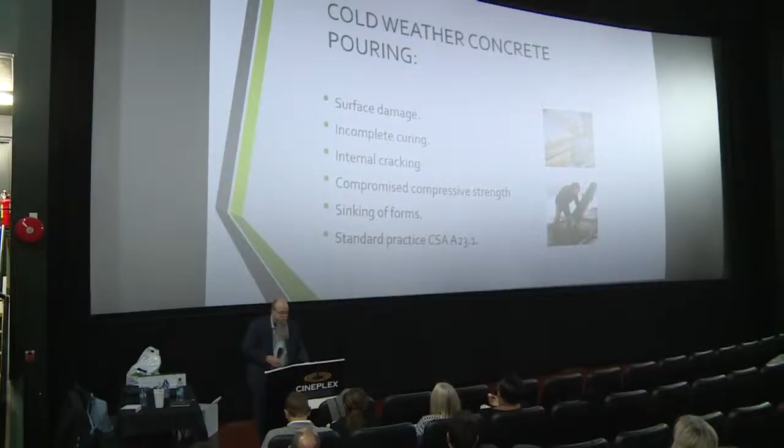Another consideration is an example from last year where we had an issue where some forms were built. An insulated tarp was placed over the formwork with a heater, and it was left overnight to heat the area in preparation for pouring the next morning. The heat thawed the ground, allowing the formwork to sink almost 2 inches into the ground, and that went unnoticed. And the difference in the elevation required days of rework to fix.

So it would be a great idea for everyone involved in concrete work to refresh their knowledge of cold weather concrete requirements and methods. So, our update, what we've been doing for the last year.

What's that? Nope, one back. I'm going to go like this every time it needs to switch. Maybe not quite as drastic as that, but.

So over the last year, we've been focused on writing and revising the quality program, preparing quality moments like the one I just read, preparing newsletters, quality plans, inspection and test plans, reviewing site records, preparing project teams for customer audits, implementing a site quality inspection checklist. And some of you may be thinking, what do we need a quality program for when we've never needed one before? And that would be a pretty reasonable question.

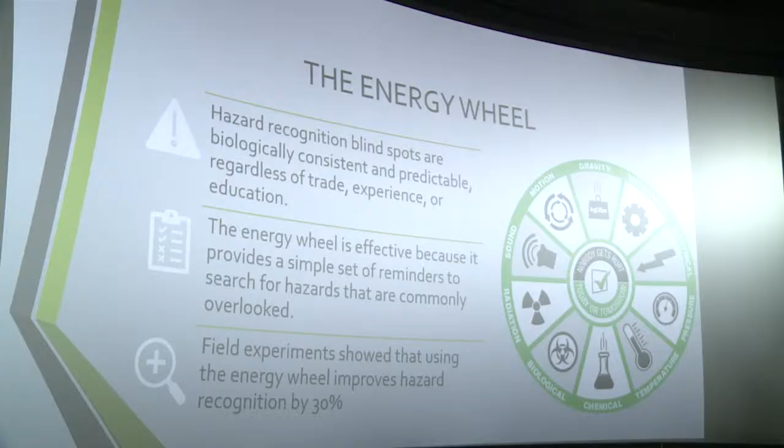So this quote is from Dr. Matthew Hallowell. Identifying hazards is a critical component of any safety program. And based on natural limitations, even the most experienced construction professionals will identify only 45% of the hazards in each site. So the energy wheel: hazard recognition blind spots are biologically consistent and predictable, and they're regardless of trade, experience, or education. And the energy wheel is effective because it provides a simple set of reminders to search for hazards that are commonly overlooked. Field experiments showed that using the energy wheel improves hazard recognition by over 30%.

So, my fingers just stopped working.

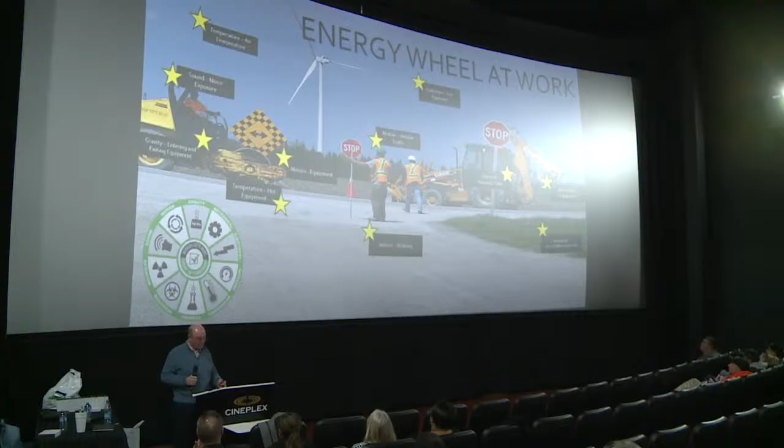Looking at the grass, we got biological hazards. Could have been just recently sprayed. There's allergens there. Just the motion of walking and the motion of vehicular traffic. The temperature, right, for the equipment. Gravity getting in and out of that packer. The sound and noise exposure from the thing.

Just a quick look, though, at Buddy running the stop sign there. Is he in the right position for what he's doing? No. Where should he be? He should be looking at the camera if he's directing traffic from the road coming towards him, right? So, good, I'm glad you caught that. This thing gonna quit. There you go.

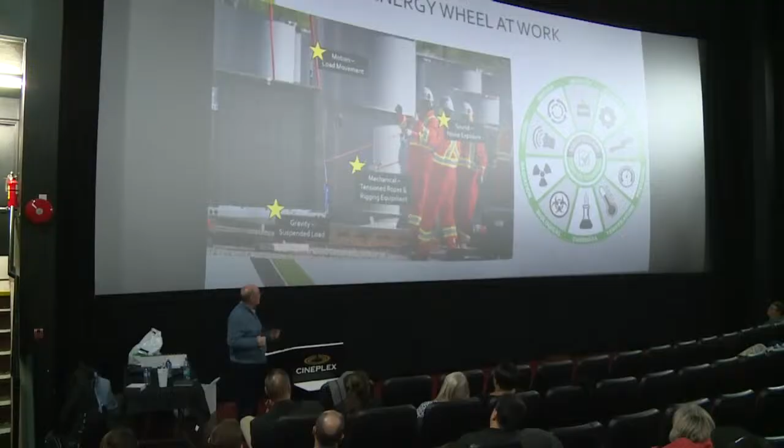So the next one, have a quick look at this scenario. There seems to be 4 guys here ready to go. Okay? Now, thinking of the energy wheel, we have motion for the load. You've got 2 guys holding tag lines, so you got mechanical tension from the ropes and rigging. You got the gravity of the suspended load. And you got sound exposure. Obviously, it's a loud environment because they're all wearing muffs.

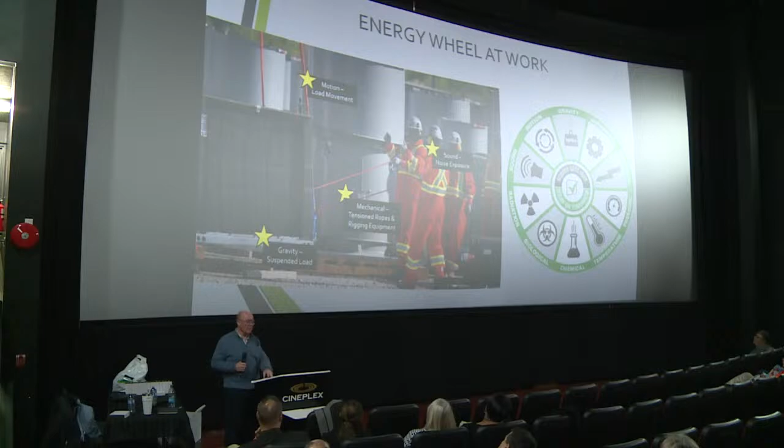Anything else in that picture bother anybody? If I can use this fancy laser. I don't know if you can see that. Buddy here is off to the side. Don't see what his part is to play. The guy on the right. You've got 3 guys there. Looks like they're directly involved. You have a 4th off to the side.

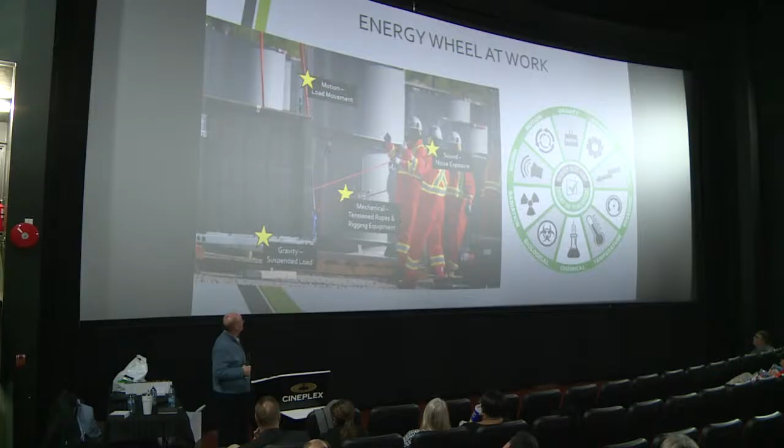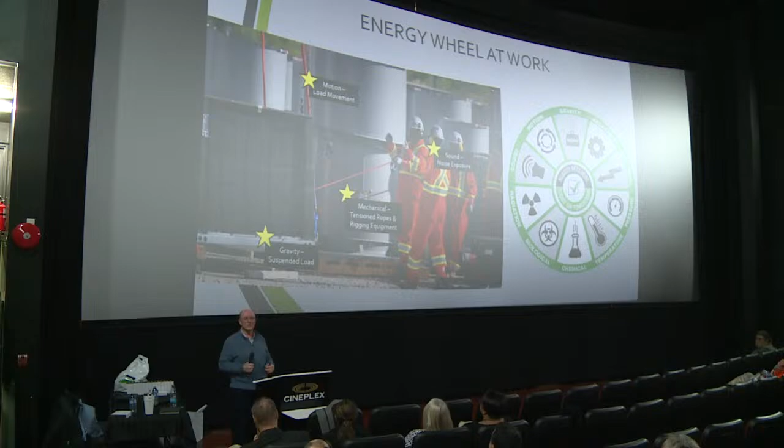Also, the other issue that I have with this activity, you got 2 guys on the tag line, and the one guy on the tag line closest to the picture, he's also signaling, right? You got enough guys to do the job, you assign somebody to the task, and that makes it a lot safer. Let the guys tagging the load concentrate on tagging the load and let somebody else do the signaling. So that's my own thoughts anyway.

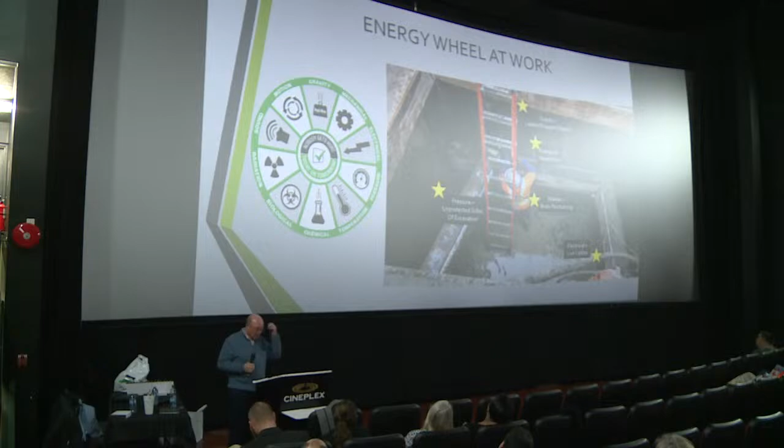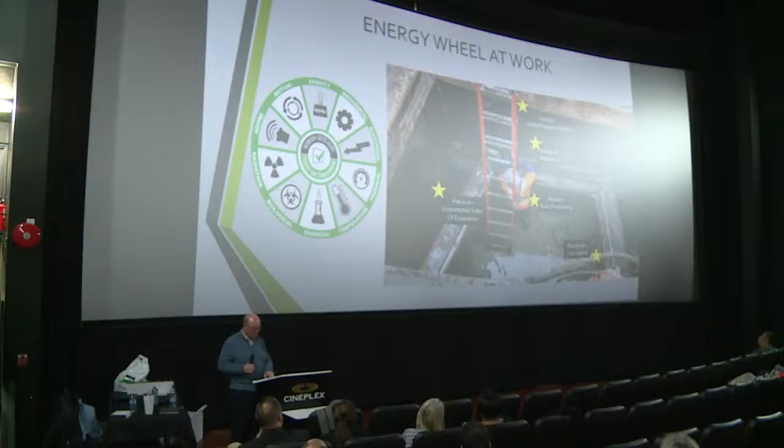So, what do we see here? We've got gravity, obviously, from the ladder and dropped objects. The wood dust, because if you can see in that picture, he's cutting that wood. So he's trying to move that timber over, would be my guess. The unprotected edges, where the star is here, the unprotected edges, there's nothing there. It's just straight down cut dirt, you can see it. Electrical cables. Should he be in there?

I heard some no's. Based on what I'm seeing in this picture, the answer is definitely no. Exactly. He's got shoring on one spot, right, in front of the ladder, seemingly behind, but on his left-hand side where he's cutting that big timber, on the left it's just straight down dirt. So it's not a safe excavation, right?

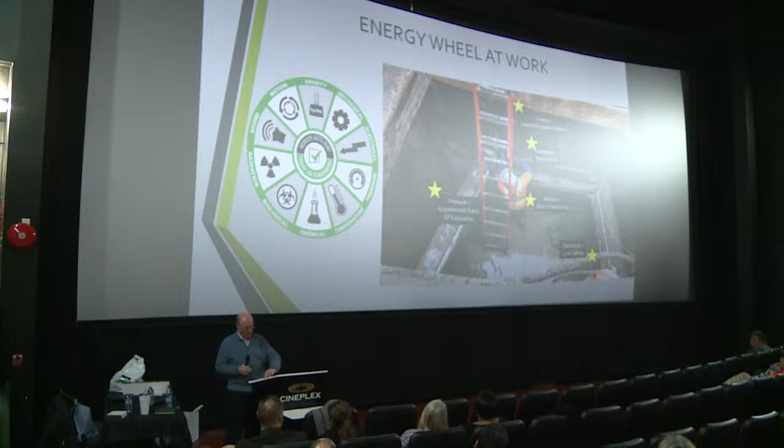Stuff we encounter all the time, right? We move through a job, we get started. He's down there and notices it. What's the best thing he could do? Stop and get out of there and say, let's have a look, guys, and let's redo this, right? That's really what all this stuff's about.

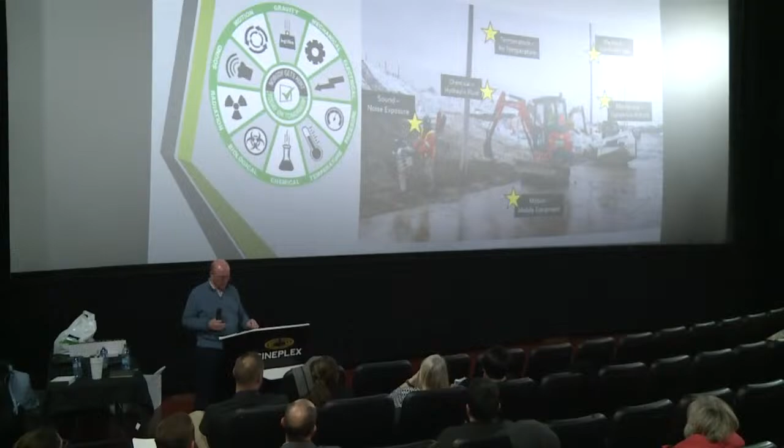Here's an easy one. Lots of equipment in the area. Now that you've seen all these, you should be able to pick these hazards out real quick. So, overhead line's always the one to get, you think it's out of the way, but it's still there. It's still a hazard in the area. Something happens to one of these poles, it gets undermined, right? You got the equipment failure.

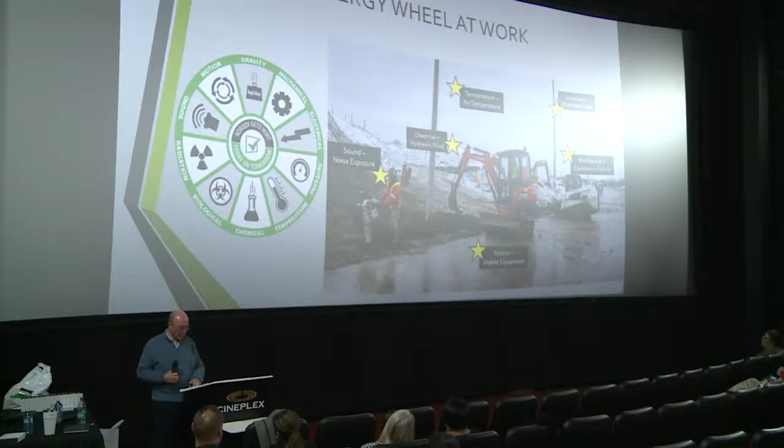Air temperature, obviously, it's a cold day. Cold and wet. You see the ground's all wet around there. The motion of the equipment, hydraulic fluid, sound exposure using that jumping jack. Operators being aware of those around them. You've got that skid steer buzzing around. You've got that Mini X and that other one behind. And the gentleman with his back to everybody running his compactor, right?

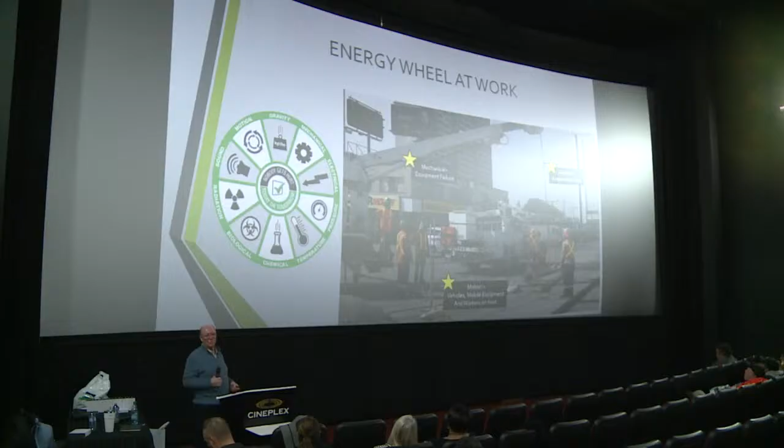Here's another operation with an RBD. Fence in between. So, do we think about mechanical failure when we're working with this stuff? We should. That's why we don't get underneath the boom, right? Don't get between the boom and the load. We've got 4 workers on one side of the fence. We have one on the near side with the pole by himself holding a loose tag line. I'd like to see another, when you're tagging stuff as 2 people, right? And when you're tagging something like that, you're both pulling. So then it's a much easier and better way to control the line.

The gentleman's got his bin open in the truck. He's got his back to the work area, which is not ideal. And again, we've got 4 guys on one side of the fence and only one on the other with the pole. A better setup would be he should have a partner helping him out. But if you look at the bottom of where he's standing, this thing's freaking useless, right there. See how close he is to that little ledge? That's something you take your mind off of what you're doing. You just step back as that pole's being raised, and now you've got a guy falling with an uncontrolled load, right?

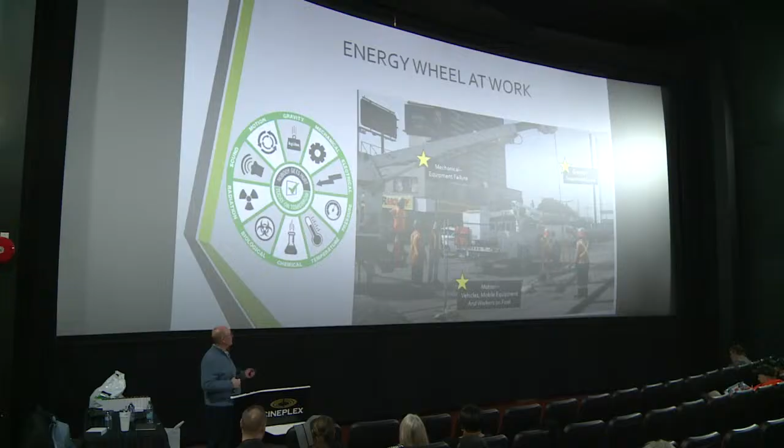So, are these criticisms that I'm making? Not particularly. What it is, is observations. It's getting you to think about the stuff that you're doing. Take those extra looks, right? Don't just keep moving along at a fast pace. Do all your movements measured and make sure that they're all controlled and identified.

So, when we talk about the energy wheel, again, workers identify only about 45% of the hazards they face. Hazard recognition blind spots are consistent and predictable, regardless of trade and experience or education. Hazards that are easily identifiable, gravity and motion, are recognized instinctually and require comparatively low cognitive effort. But hazards that are most often missed, mechanical, pressure, chemical, require relatively high cognitive effort.

Field experiments showed that using the energy wheel improves hazard recognition by 30%. That's a good boost, and it will certainly help make for a safer environment. The energy wheel is effective because it provides a simple set of reminders that are commonly overlooked. And science suggests that some hazards are overlooked because of blind spots that affect us all. In other words, what we once thought of as complacency may actually be a predictable biological limitation.

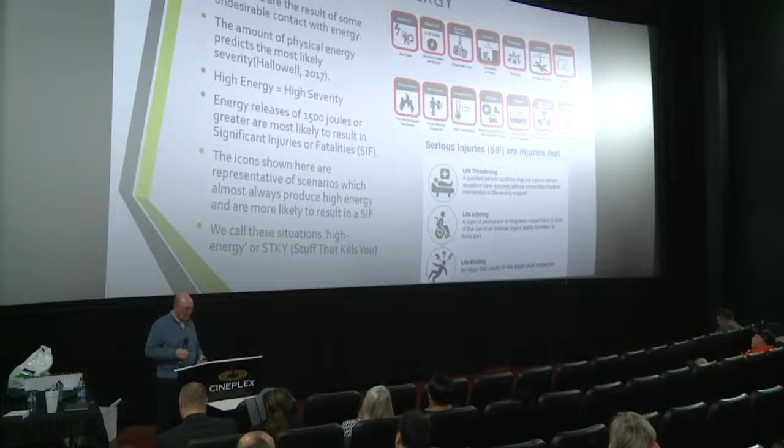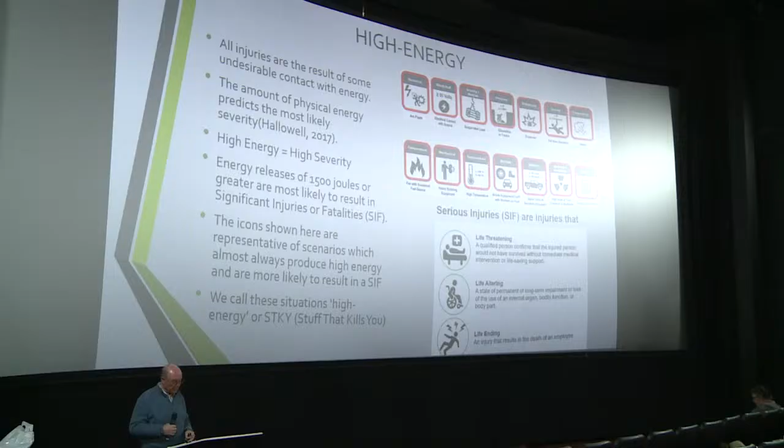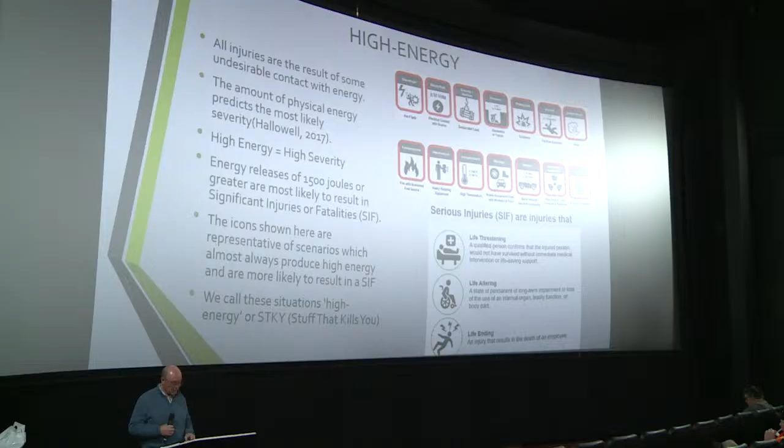So, in high energy, all injuries are a result of some undesirable contact with energy. The amount of physical energy predicts the most likely severity. High energy equals high severity. Energy releases of 1,500 joules or greater are most likely to result in significant injuries or fatalities. The icons shown are representative scenarios which almost always produce high energy and are more likely to result in a serious injury or fatality. We call these situations high energy or sticky, the stuff that kills you.

Oh, that was cool. That's, yeah. No, thanks. I don't know what happened there. Gadgets and me just don't get along.

There we are. So, these sticky icons, the stuff that kills you. I see something blanked out there, the shit that kills you. These are all, again, things to spur thoughts, right? You look at these and they make you think. Look at the arc flash, the electrical, greater than 50 volts, gravity, pressure, the temperature, all that good stuff. It's just, again, to make you think. That's what checklists are all about. Because not everybody knows everything, right? So checklists do make you think about the stuff that you're going to be working on.

So controls: after the hazards have been identified, we must know the different options we have to add layers of protection. All identified hazards must have safeguards applied to them to protect from harm or damage. All SIF hazards must have direct controls applied to the target energy source.

So a safeguard is a measure taken to protect someone or something from harm or damage, or to prevent something undesirable. Safeguards can include direct controls. A direct control that specifically targets an energy source, when installed, verified, and used correctly, will mitigate exposure and must be effective even when people make mistakes.

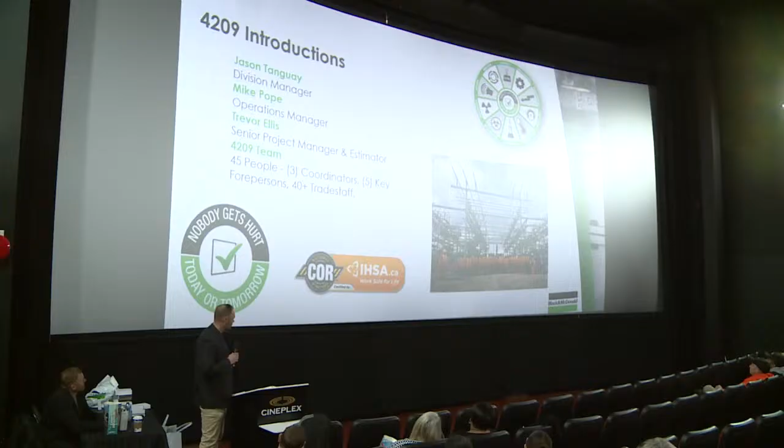Within the group, we have about 45 people. We have 3 coordinators, 5 key forepersons that lead our jobs in the field, and over 40 trade staff. Those 40 trade staff people are kind of homegrown Black McDonald people, and sometimes we pull from the local union halls as needed. That photo over there is a picture of the Lozon TS that was just completed with a lot of the team members.

Okay, hey everyone. So yeah, we've put a lot of work into our safety initiatives. We've come down to basically 3 things: communication, planning, and experience. A lot of our incidents that have happened, it's one of those 3 variables. So what we did is we put a bigger emphasis on communication. So now we do 6 meetings monthly for safety purposes and our processes. We start off with our monthly supervisor meeting with Sauer, the one that Wes hosts, and all our supervisors are on that. And then they report back to the field staff.

We also went a step above and now do a monthly foreman meeting. It's kind of turned into a bit of a round table type of meeting where foremen can bring up ideas, update the team on their projects, and also bring up safety incidents and near misses, and rely on each other for experience, and just create more of a well-versed and open dialogue in terms of safety. Because before, we tried our best, but we found that there were some improvements that could be made. So once we initiated that, we saw a difference immediately. We also do weekly safety meetings with our field crews.

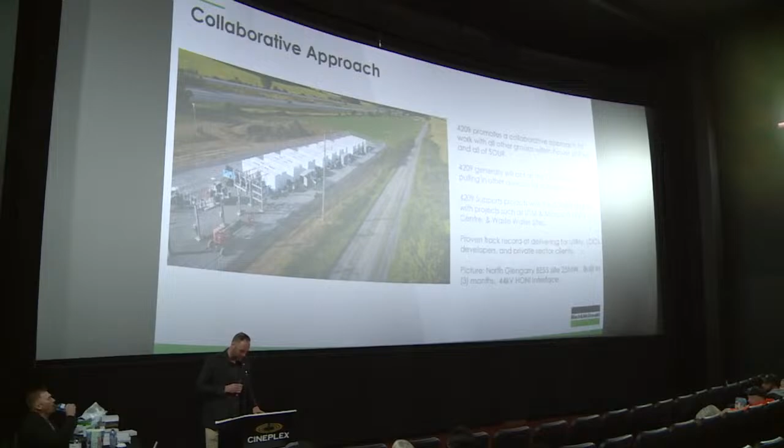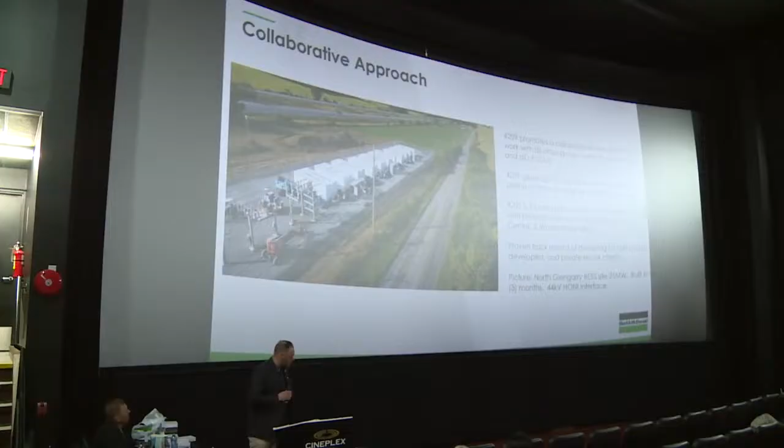Thanks, Mike. Just to add on the health and safety side of things, special projects this year had zeros across the board, so that's a great job to the guys that are here. I know most of the division is here. We worked over approximately 90,000 people hours this year, so that was a huge accomplishment.

So we really do promote a collaborative effort within the Power Utilities Group and across the Southern Ontario region, working with transportation and Joe's group. 4209, we will generally act as the GC on projects, pulling in other divisions for specialty scopes. 4209 supports projects on the electrical mechanical side, so we've done some projects at UTM this year, the Microsoft Data Center, and some wastewater sites.

We have a really strong track record with utility scale work, local LDCs, developers, and private sector clients. The picture that's shown there is a 25 megawatt battery storage project that we did in what's called an engineer, procure, construct model. So we did all the engineering, we did all the procurement, and we did the construction. We were boots on the ground there for about 3 months.

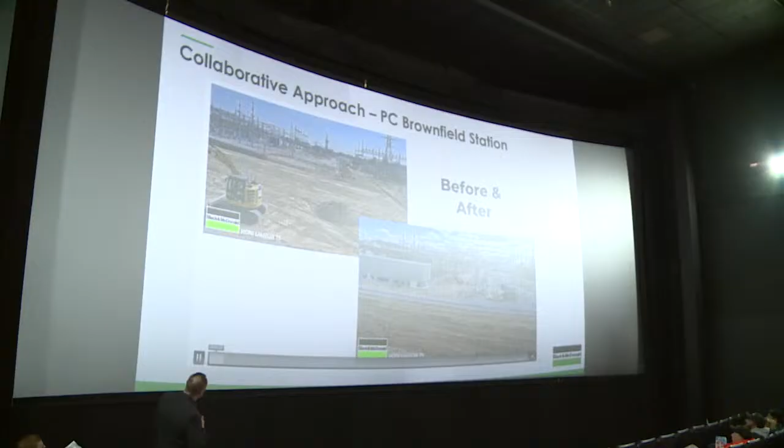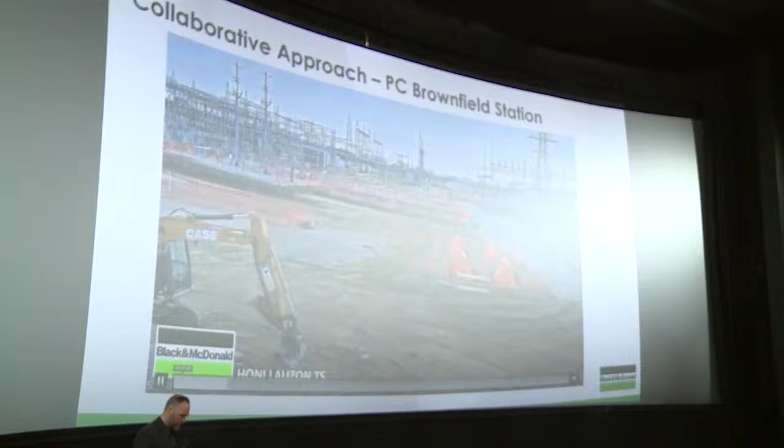Okay, so this project is in Windsor. It was project managed by Rob Palauta. The scope was to add a brand new 28 kV switch yard. We came across a lot of challenges on this project. We found abandoned cables in the ground, which really held us up. Nobody knew where those abandoned cables were, so we had to do a lot of investigating, a lot of hydrovacing to find either end so we could remove them.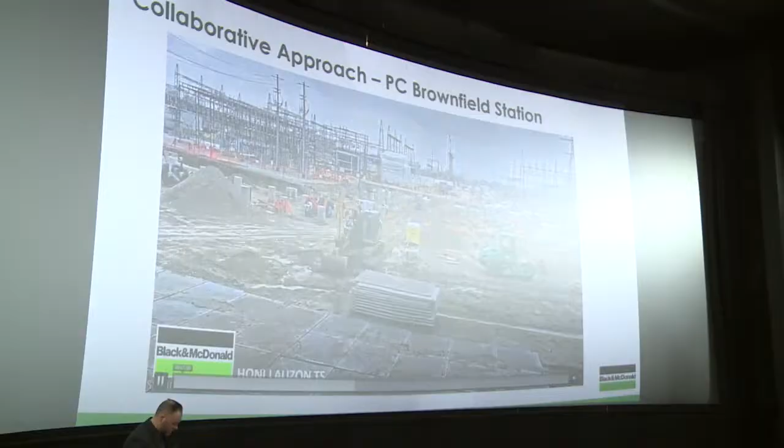We also were given a pretty lousy design upon mobilization. I would say at best it was a 60% design, so we really had to push Hydro One to get the design to where it needed to be so we could continue building. We had horrible winter working conditions. Everyone remembers last winter. It was cold every day. We had snow every day.

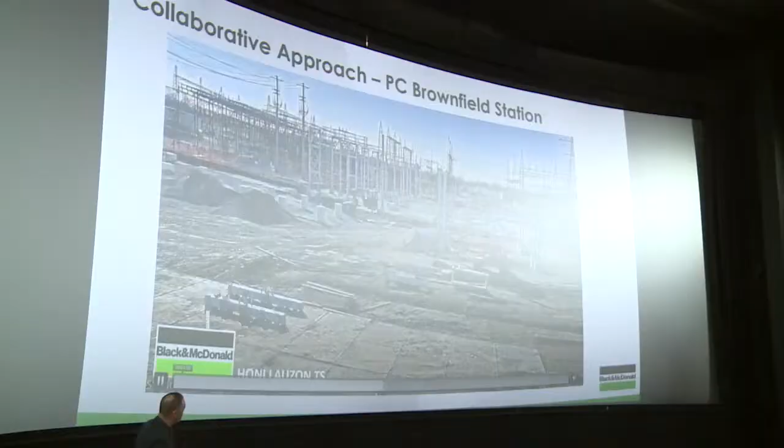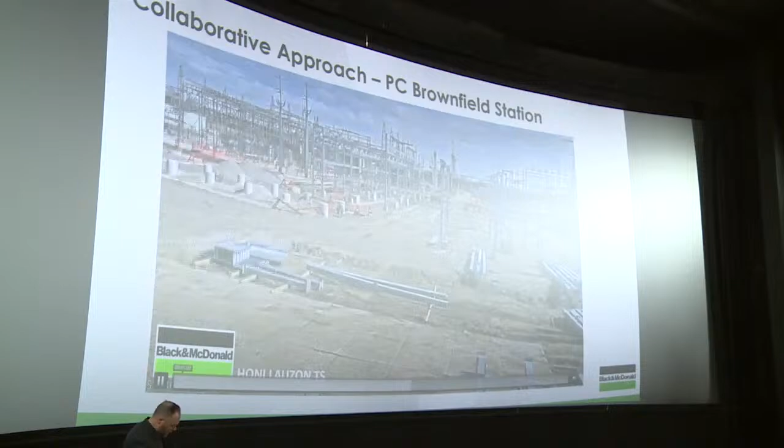We also had extremely tight access. Hydro One was working all around us, so they were constantly keeping their eyes on us, watching what we were doing and complaining and whining. The live station component, so everything around us was also live, so there was a lot of health and safety that went into this. And ultimately, the project was due to be substantially completed this year, and we made it, and Hydro One was actually extremely happy with the work.

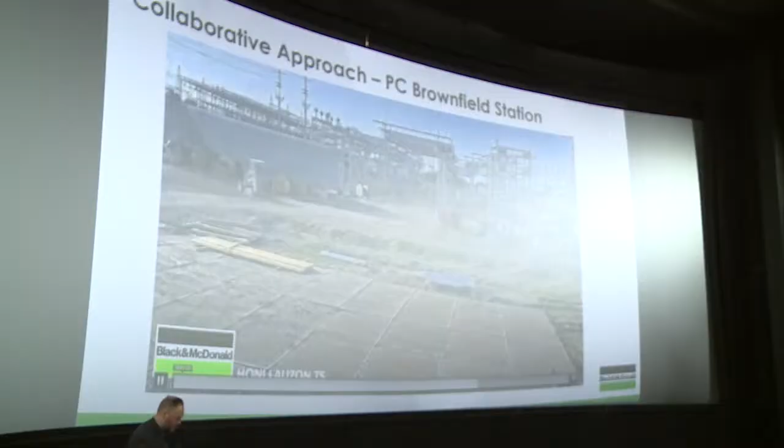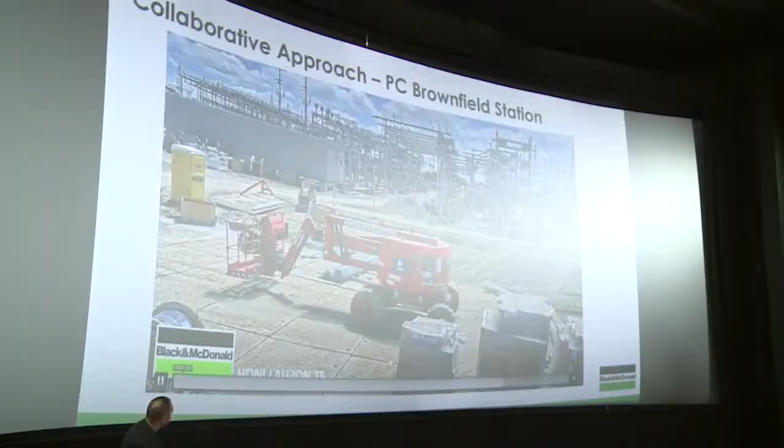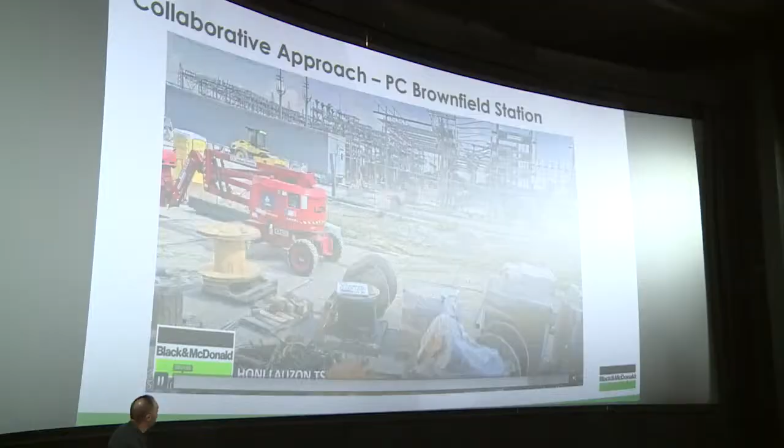Again, collaborative effort between my division, substations, Arjun's group. And that building that was installed there was actually the very first protection and control building that Black & McDonald had fully designed and engineered and installed for Hydro One. So basically at this point, we're just working our way out and cleaning up the site. And there's the team.

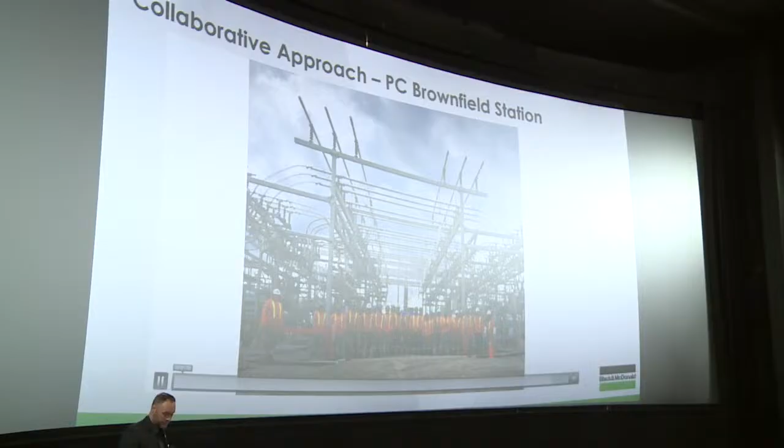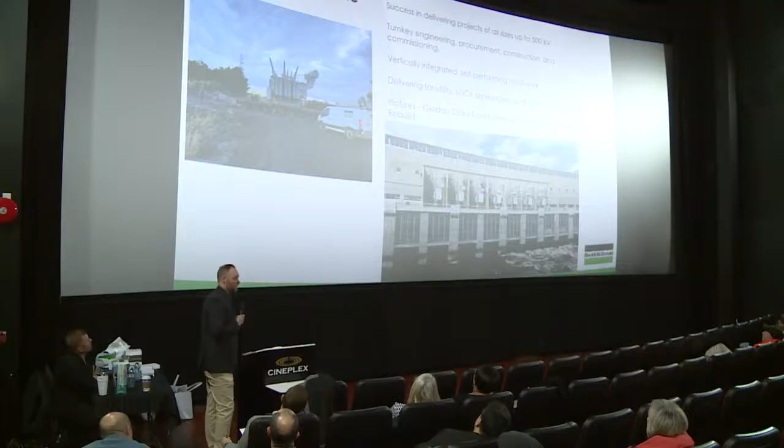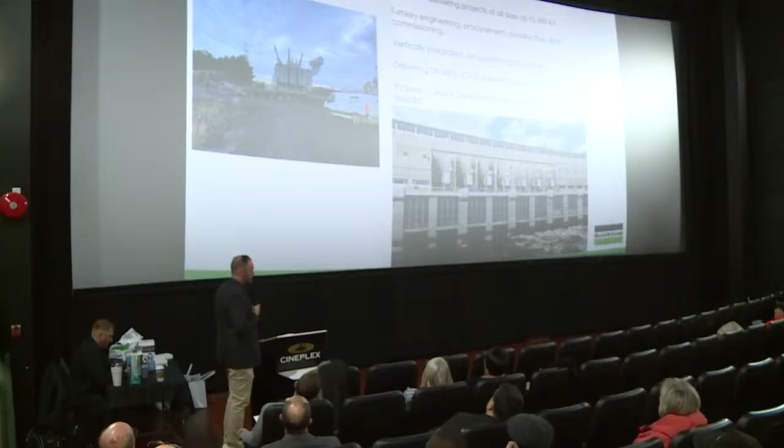Go ahead, next slide. So here's some other pretty cool projects we've done recently. We do projects of all different sizes, all different types of complexity. So turnkey engineering, procurement, and construction projects, like I said, the EPC model. We self-perform pretty much all of our own work. And again, delivering to the utilities, LDCs, private sector clients.

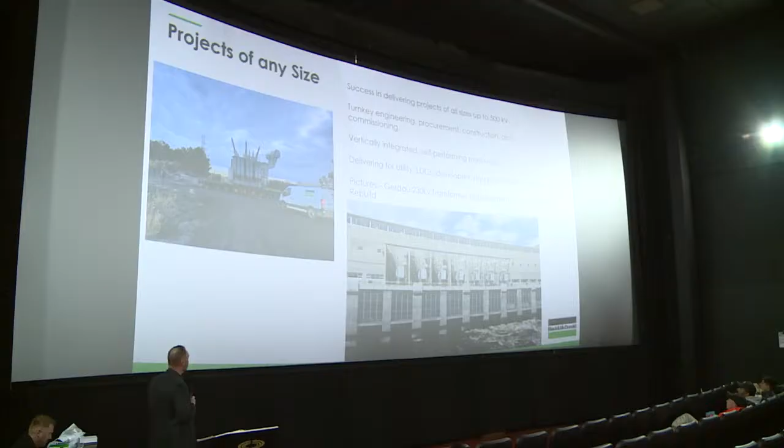The photo up in the top left is us removing a 100 MVA transformer from Gerdau Steel in Whitby and replacing it. And then one of my favorites is the picture in the bottom right there. Those are 7 massive transformers on the side of the Otto Holden generating station just outside of Mattawa. We had to take apart and fully rebuild those transformers in place for OPG. That was a really, really cool job.

This is another video. So this one has sound to it. Some of you might giggle to the sound. But this is called Old School DS. This is part of Hydro One's new distribution substation program where they have about 300 of these across the province that they're looking to replace. This is the second that we've done. They've done 3 now, and we've done all 3. And again, Hydro One's been very happy, and again, we've collaborated with Arjun's team to do commissioning here. So go ahead and play that video.

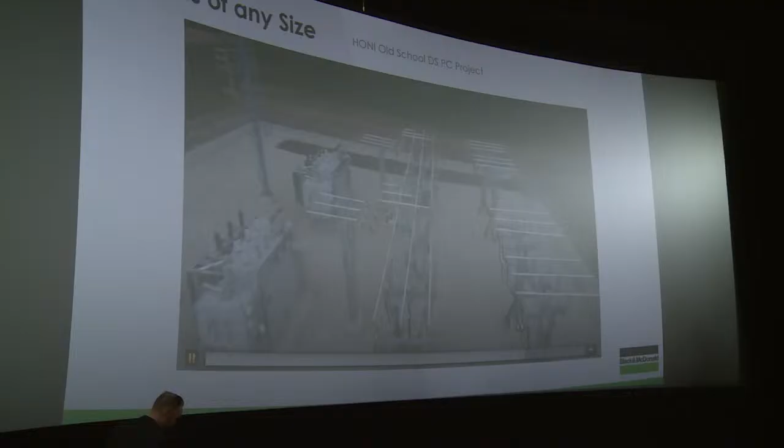So that project was, you can go next slide.

I feel like I should be tossing t-shirts or something. More hot dogs. Do you want to go to the next slide?

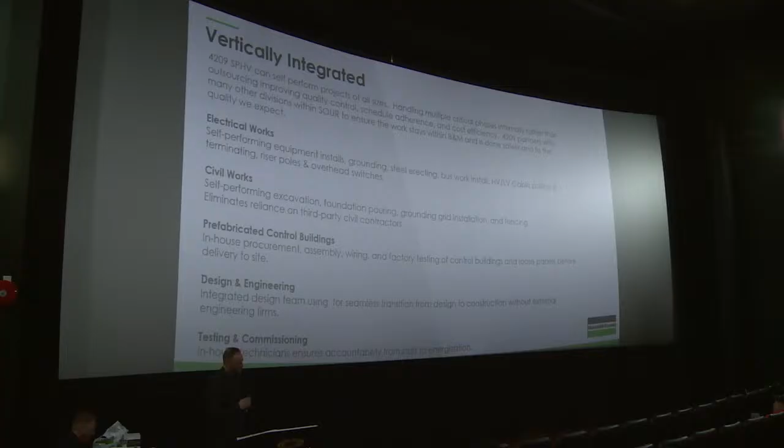So that project there was a PC model, they call it. So the engineering was designed, it was provided to us. We went out and procured all the equipment and materials for that job. And again, it was a very successful project, besides the excavator getting stolen, which wasn't ours, so that was good.

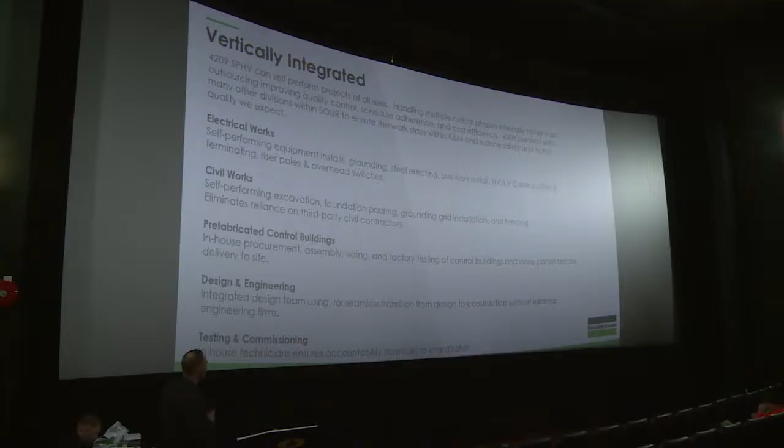So 4209, special projects. We can self-perform projects of any size, handling multiple critical phases internally rather than outsourcing. It improves control, quality, schedule adherence, and cost efficiencies. We partner with many other divisions within SOUR to ensure work stays within Black & McDonald and is done safely to the quality we expect.

So electrical works, we self-perform equipment installs, grounding, steel erecting, bus structures, HV and LV cable pulling and terminating, riser poles that are connected to substations and overhead switches. We also self-perform our civil work, so excavating, foundation pouring, ground grid installations, fencing, and that eliminates a reliance on third-party civil contractors. The prefabricated buildings, we do these at various sizes, and again, working collaboratively with Arjun.

Design and engineering, so we have this bolt-on with Arjun and Ryan's group as well. What really brings value to this piece is you have independent engineering firms out there that have no idea how to actually install or build a substation. Our group knows how to do it. So when Arjun's group is doing a design and they pass the design over to us for constructability reviews, we can find deficiencies and problems in the engineering stage that wouldn't necessarily be found if it's just an engineering firm pumping out a set of drawings.

And then last but not least, the testing and commissioning in-house, again, bolting on with Ryan and Arjun's group. So if there are defects or deficiencies found during post-construction, our team will go in and make those rectifications before we hand it over to the customer.

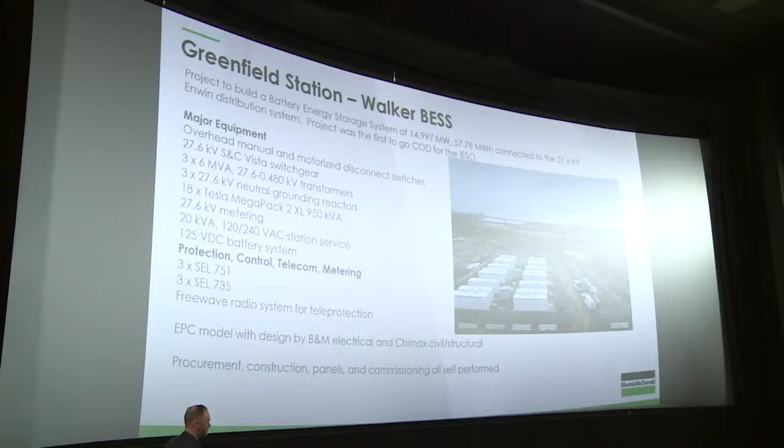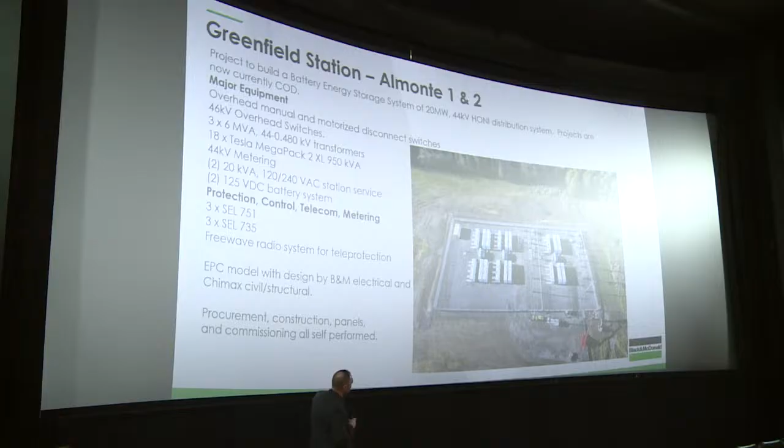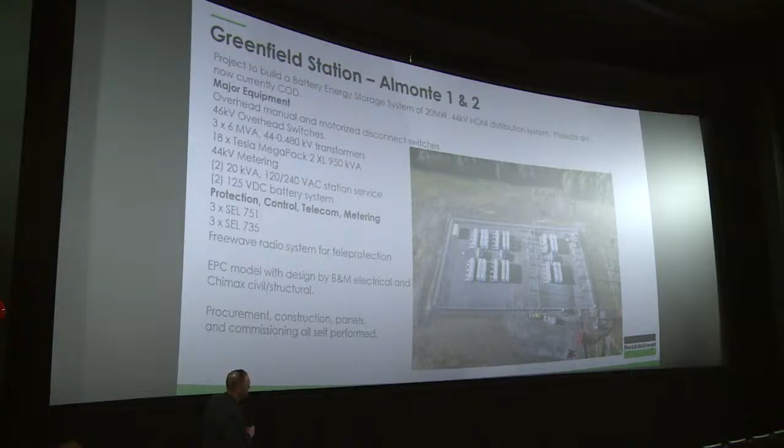Moving on to Almonte 1 and 2, these are 44 kV grid connected projects which fall under that same procurement model. So you can see the delineation between the right and the left side there. Again, these were full EPC projects by 4209. Everything was self-performed in-house, including the civil work. Here, this site sat on bedrock. So instead of forming and pouring foundations for the megapacks to sit on, we came up with a precast block method that the megapacks would sit on.

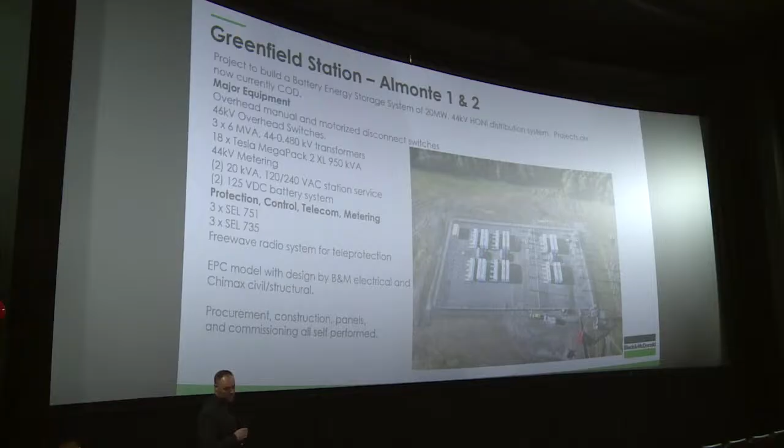So we could precast and build all the blocks off site before getting to site, because our client didn't have municipal approval for us to start in time. So the way we expedited it was precasting all of these off site. As soon as we got to site, we were able to scrape the topsoil back, pack down a layer of granular B, and then place these precast blocks right on, and then away we went with the megapacks. We saved about 6 weeks there.

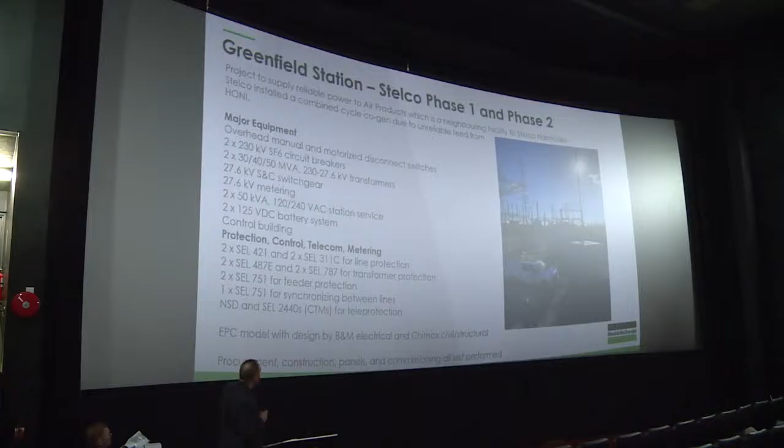This is Stelco. So this is a steel plant out in Nanticoke. They built a large cogeneration site on their site. There's a plant right next door to them called Air Products. Air Products feeds them various gases for their process, so Stelco can make steel. What was happening was the Hydro One line going into Air Products was very unreliable and kept tripping out, meaning it would take Stelco offline.

So Stelco got the idea to build a cogen, and they hired Black & McDonald to build the substation that would take the power from the cogen over to Air Products. So this was the site that we built. There's 2 transformers there, and again, this was done on a full EPC model.

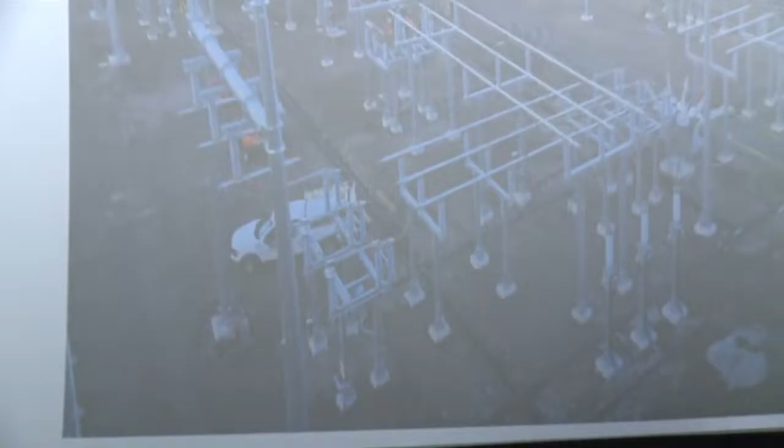Okay, this is one that we're approaching completion here. So this is called the Antoine Transformer Station. This one's just outside of North Bay. This is a massive footprint station, about 400 meters by 400 meters. There's 2 very large 230 kV to 115 kV, 120 MVA power transformers that are there.

So again, Black & McDonald is self-performing all of this work. The building you see in the top there, that was done under an EPC model. So essentially the brain of the substation is going to go into that building. All of the protection and control panels and relays and everything that'll control this substation are just going to go into that building. And we did the design of that building and we constructed it.

This project is being led by Alec Davis right now. And again, we're very close to nearing completion. We're already starting to battle some snow and ice up there already, so we're in good shape.

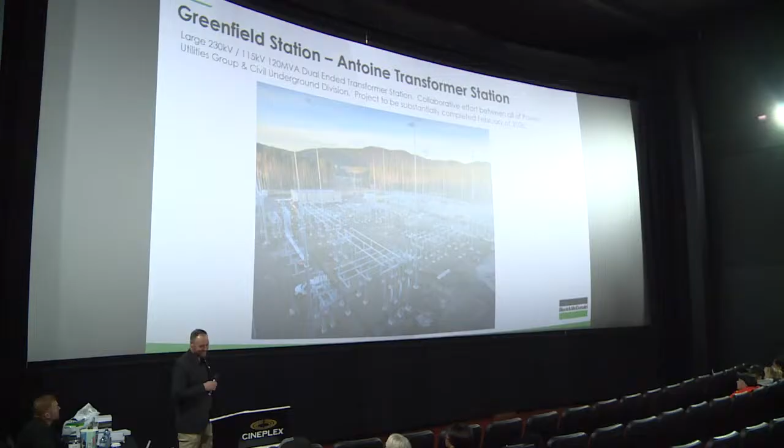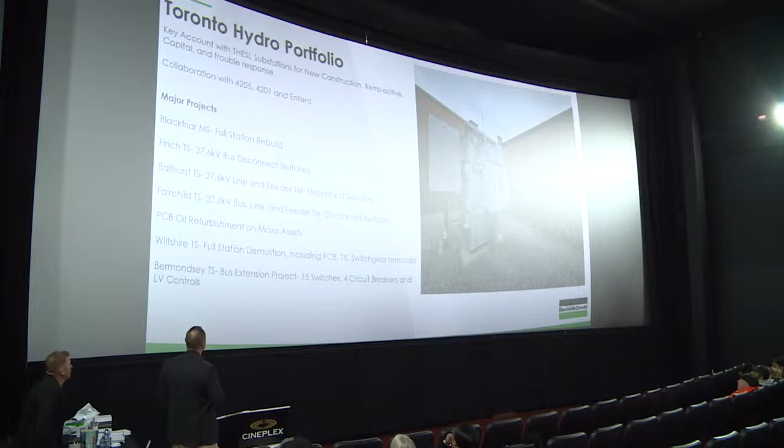Okay, so on the Toronto Hydro portfolio, I'll hand it back to Mike, and he can run through 2 or 3 projects on that, and then I'll finish off. Thanks.

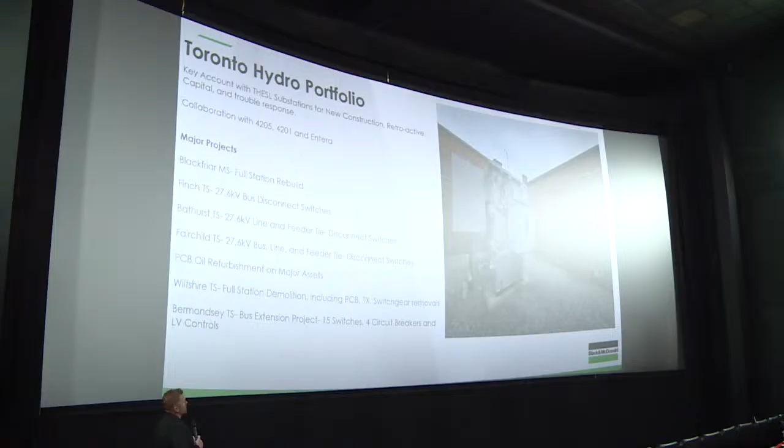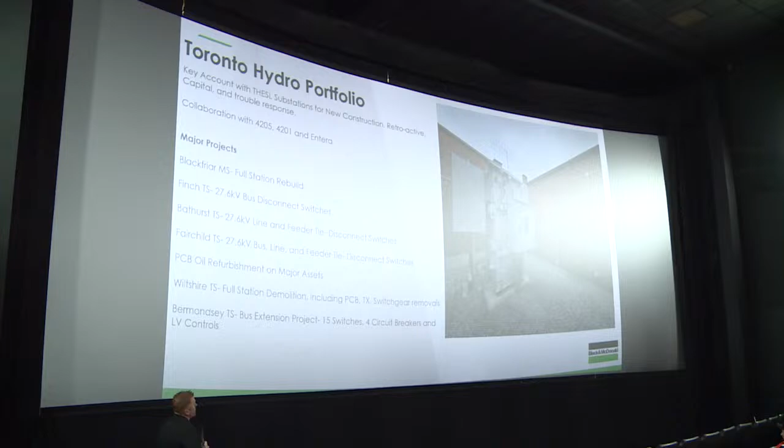So Toronto Hydro, this is our golden goose, for lack of better terms. They just keep giving us work, and they're super happy. So most of the projects that we do with Toronto Hydro are involved in the construction side, and it's the new substation retrofit, also some capital work and some minor trouble response. We've teamed up with Arjun and Ryan's group at 4205, and it's been a great relationship with Toronto Hydro. They basically just hand us the green folders.

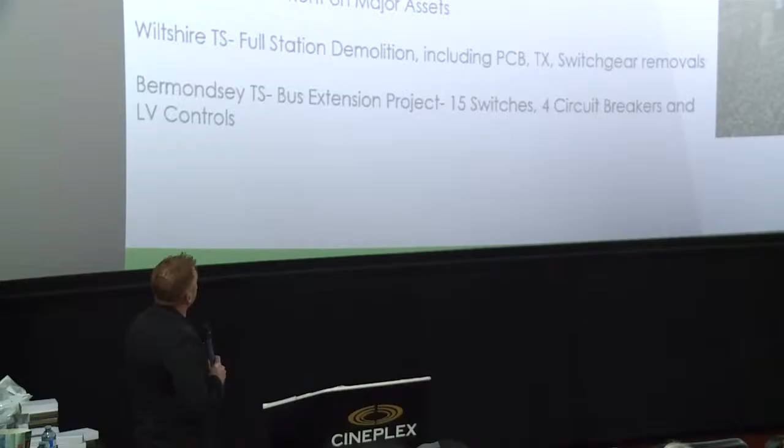We also work with our lines department with Taryn's group with 4201, and then Tara helps out with a lot of the switching and the outages for the substations. Major projects that we did this year was Blackfriar MS, so that was a full station rebuild, which is that picture there. So a brand new transformer, duct bank, switchgear out to the road and primary incoming, and we are about 6 weeks ahead of schedule.

So funny story with this station here is this is now the poster child for all new substation builds with Toronto Hydro. Shout out to Mark Harris with that. Toronto Hydro actually brings the other contractors to the site to show them how it's done. So quite proud of that project.

There's also Finch TS, Bathurst, and Fairchild. The line department knows these projects very well. They help support us. They gave us 55 switches to do by the end of the year. The main challenge was time. They gave us only an 18-day outage to do 13 and 12 switches, totaling towards the end of the year 55, like I mentioned.

And Minecore is the supplier of those switches. One highlight there is that Minecore actually gave an extended warranty to Toronto Hydro if Black & Mac is the installer, because they certify our quality of work. So that sets us apart from all of our competitors.

So they basically hand us these switches. They haven't been fun, I'll be honest. We've had to do custom switches for most of these installs. But based on our skill and our field staff, they deliver always under schedule and under budget. And another shout out to Arjun as well for the support there on the engineering side and the Toronto Hydro admin side. We also are getting into a lot of PCB oil refurbishment on major assets in the GTA.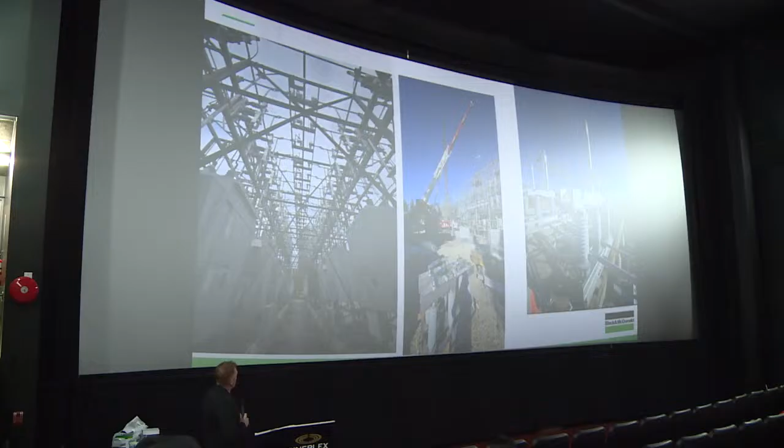Here's some photos here with our switch projects. Again, shout out to Evan and Andrew from the line division for supporting us through these projects and getting us over the finish line. As you can tell, it's pretty busy in there, right? So if you can see, I don't know who's got the laser, but all that whole lineup is all the brand new switches we put in.

So there is a ton of work that goes into getting a proper safe work zone, outages, all the feeders that are involved with this area. And I think we absolutely hit it out of the park with these projects. So again, hats off and thanks to our line division for the support and the collaboration there.

And yeah, in the middle, that one there is Bathurst, and then the far right as well. So that's a feeder tie switch for those that don't know in the room. It's basically opening and closing these feeders that feed the city. Very important equipment, and a great job that we did there.

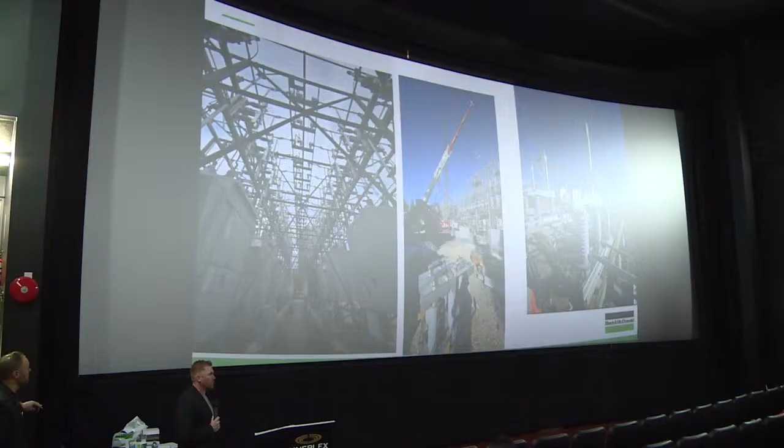So like I said, Toronto Hydro is probably our best client, selfishly, because I deal with them daily, and we're very thankful for the support and collaboration from, again, 4205, 4201, the line division there, and field services. So saying that, I'll pass it back to Jay.

Oh, yeah, we can both do it.

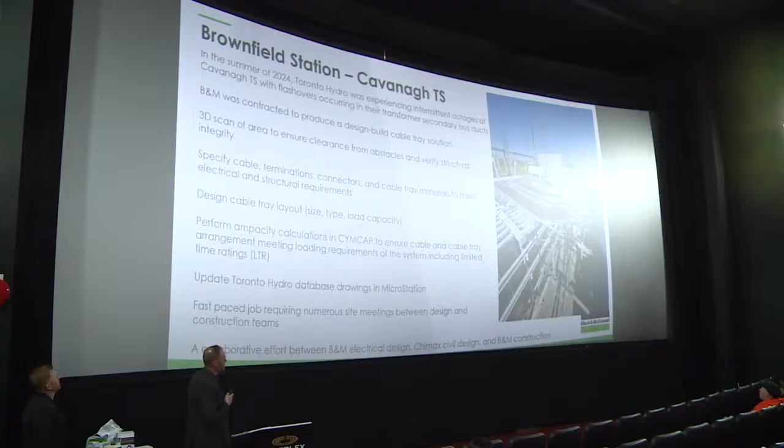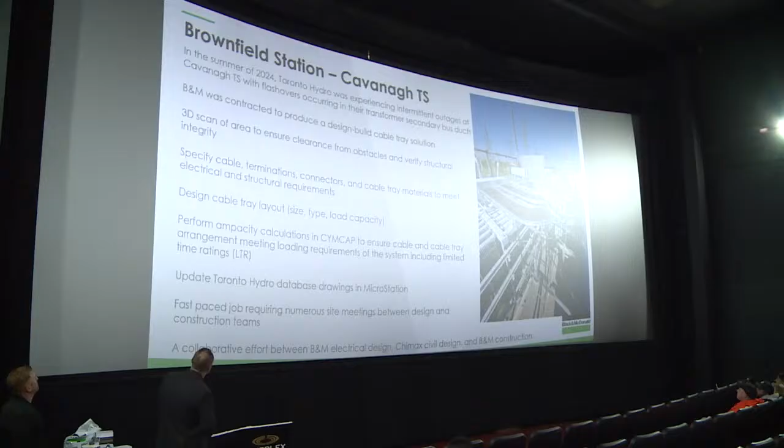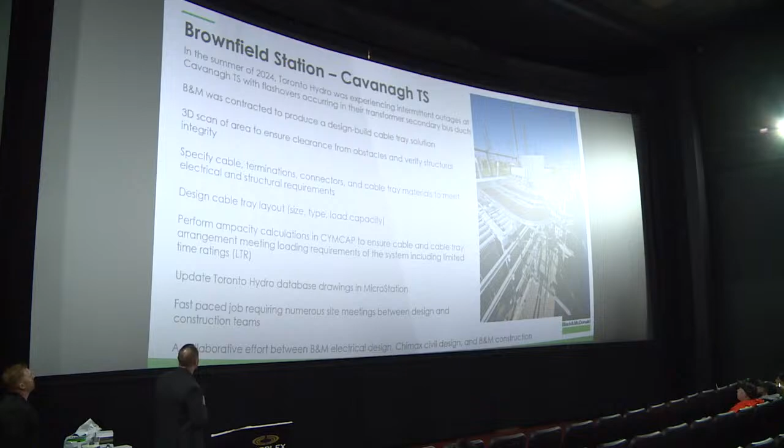Okay. So this one is Cavanagh TS. It's one of the most critical stations for Toronto Hydro. Terran's group, your grid response office is right behind it. So basically in the summer of 2024, Toronto Hydro was experiencing a lot of outages at this station because of the bus ducts that connected the transformers to the switchgear inside. They called us and we were there the next day, basically.

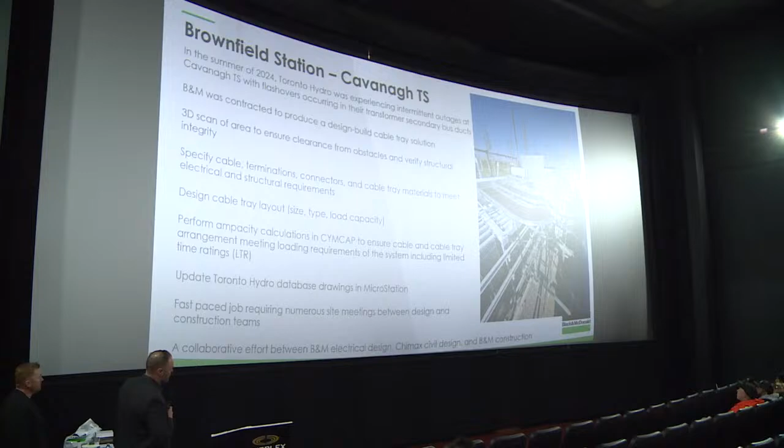And we did a 3D scan of the existing bus ducts and came up with the solution to rip out all the bus ducts and install, how much cable? Like 3,000 meters? Yeah. It was 3,000 meters, so each transformer had 2 secondary windings, so we had 9 cables per phase of 28 kV, 1,000 copper, so quite big stuff. We designed the whole trapeze system for the cable tray itself to support the weight of the cable and snow weight and everything like that.

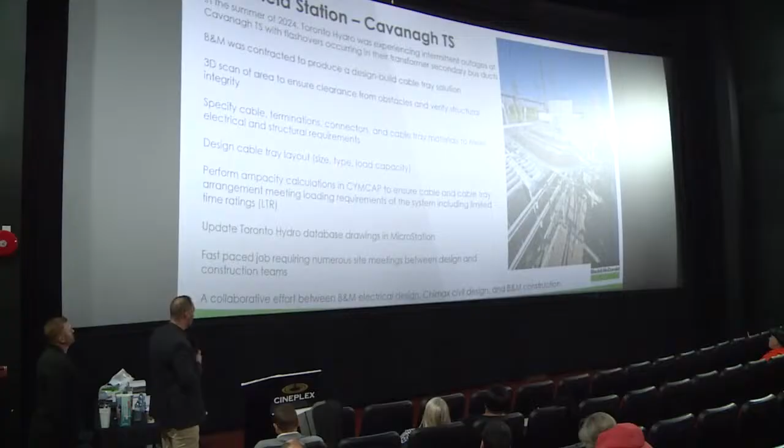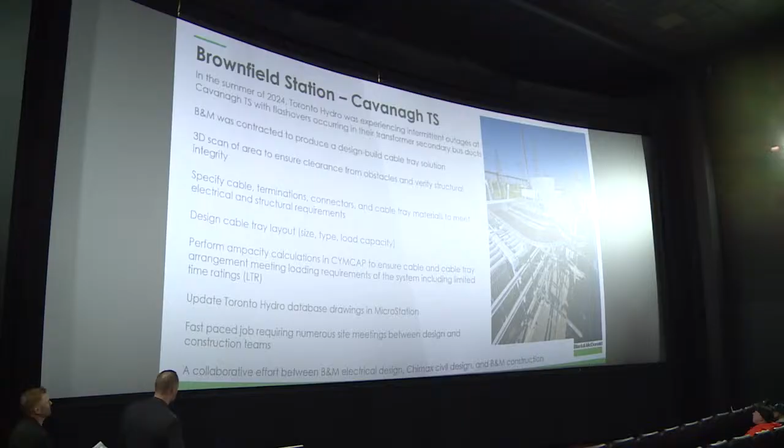We were in and out in about 6 weeks complete, and we had to build transition boxes, we had to build custom connectors and everything like that. So this really kicked off Toronto Hydro's mentality of using Black & McDonald as more of a design-build contractor, because the design could be done in our engineering group, and the engineering group could talk to people like Mike and myself and my team and get the insight of how to actually properly construct something like this.

I know I never want to climb a wind tower again, but then major power consumers. So as you know and see on the news, a lot of manufacturing is coming back to the GTA and Ontario. So plants like Volkswagen, Vianode, and a lot of these different facilities are going to need large substations and are going to need to be maintained.